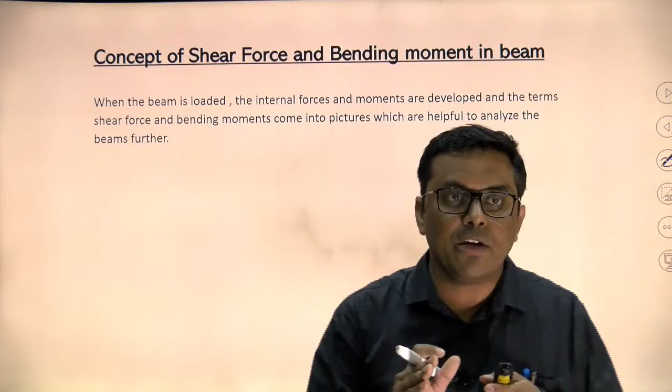I started my topic with the concept of shear force and bending moment, covering what basically shear force and bending moment is. Whenever a beam is loaded, the beam material and beam cross section offer certain resistance. That internal resistive force or resistive moment offered by the beam material and cross section is what is known as shear force and bending moment.

I am not going into much detail about why it is known as shear force or why it is known as bending moment, because that has already been covered in my previous lecture. So please go through that particular lecture.

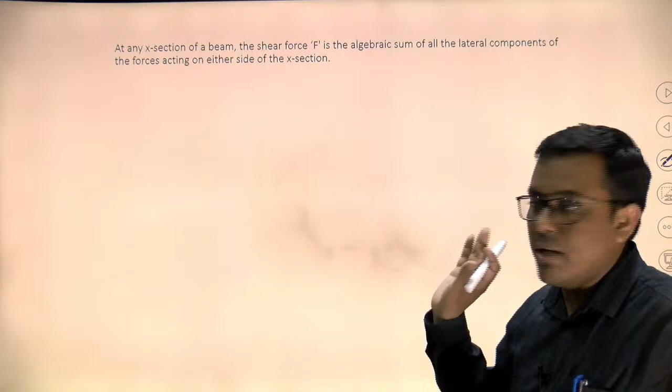Now, how to find out shear force and bending moment? I am not going into detail here since today we are focusing mainly on problem solving. Shear force at any section XX is the algebraic sum of all the lateral forces acting on either side of the section plane - either the left side's transverse forces or the right side's transverse forces. So it is the algebraic sum of all the lateral forces acting on either side of the section plane.

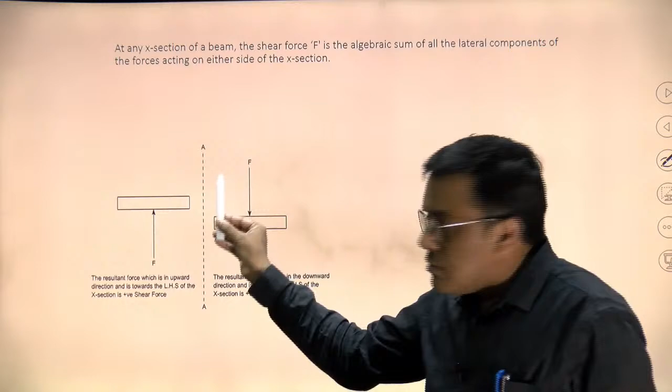Shear force is basically a force, so there must be some sign convention, and the sign convention is quite clear. If I am talking about the left side of the section plane, and the resultant of all the lateral components is upward, then I will say it is positive. Similarly on the right side, if it is a downward resultant, both will be considered positive - already covered. This is the negative one.

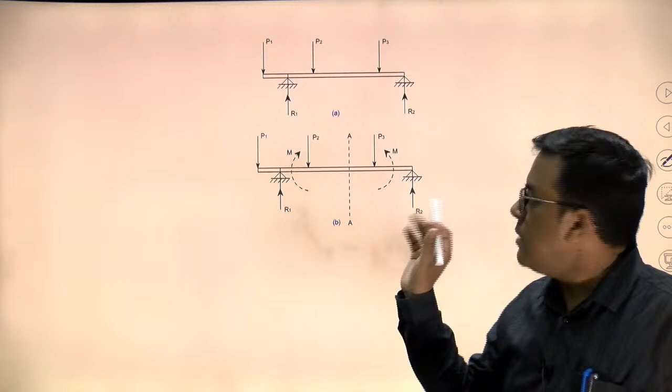Similarly for the bending moment - because we don't want the beam to get bent by any load, the beam material must be sufficiently strong to offer certain resistance against bending. That is what is known as the bending moment. And how will it be calculated? I am coming to that point.

The bending moment M is also the algebraic sum of all the moments acting on either side of the section plane. Simply, if A is my section plane, then because of all the forces on the left side, whatever the resultant moment is, similarly on the right side. So this algebraic sum of all the different moments because of various forces on either side of the section plane is considered the bending moment. This is how we will calculate it.

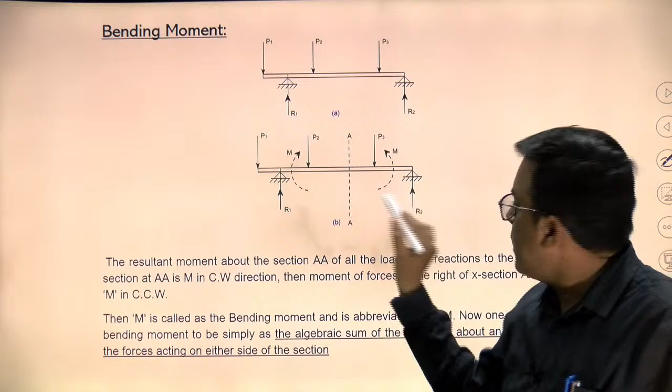And the sign convention: with the section plane shown here, on the left side if it is a clockwise resultant, and on the right side it is anti-clockwise, it is positive. Obviously, the opposite of this will be negative. So this is what is known to us.

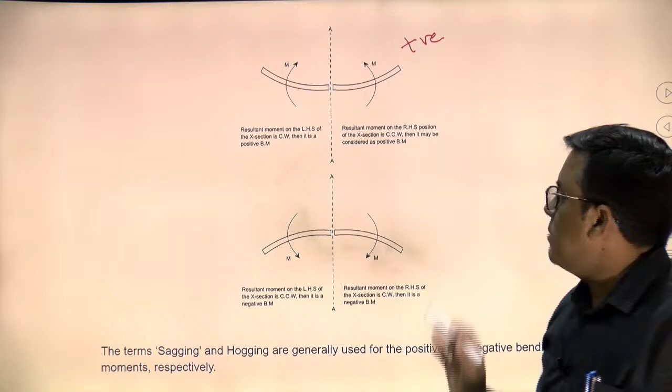Then we discussed the relation between shear force and bending moment. Yes, we tried to find out and establish that relation. I am not going into detail since it's already discussed. From an exam point of view, it can be a question for 2 or 3 marks. So those who are interested can watch my previous video, lecture number 3.

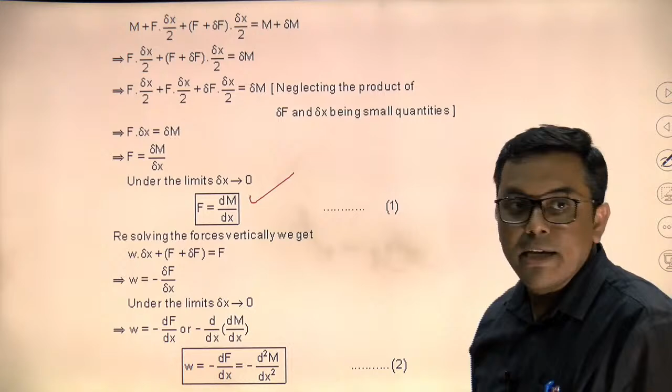What relation did we establish? We established the relation F equal to dm over dx. F is the shear force, m is the bending moment. So we are observing that there is a differential relation between shear force and bending moment. Similarly, between load and shear force it is equal to W equal to minus dF over dx.

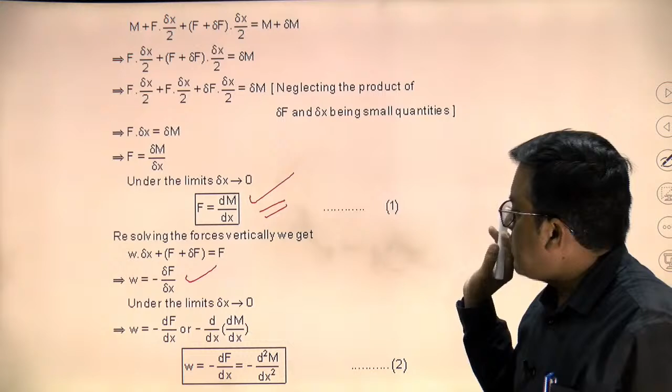But here we are focusing ourselves on F equal to dm over dx. So this is the relation between shear force and bending moment. What can we conclude? I am slightly hurried because I already covered these portions, so that's why I am going fast.

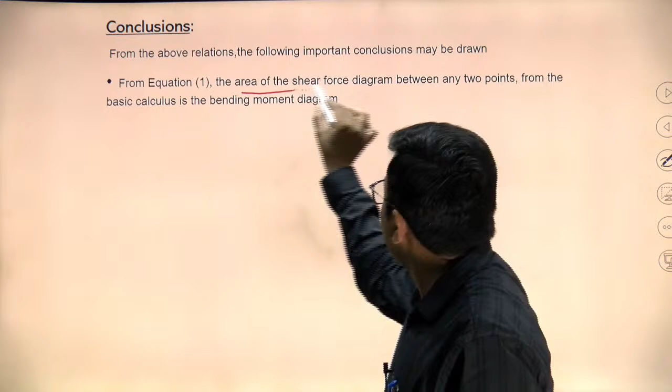Conclusion, what can we make from equation 1? Equation 1 was F equal to dm over dx. So the area of shear force diagram between 2 points is equal to the change in bending moment. This is available here: M equal to integration of f dx. Integration of f dx is the area of shear force diagram between 2 points, which will be equal to the change in bending moment between these 2 points discussed.

The slope of bending moment diagram is the shear force. Yes, it is well known. F equal to dm over dx. The curve equation is like this. The differential equation is showing this, F equal to dm over dx.

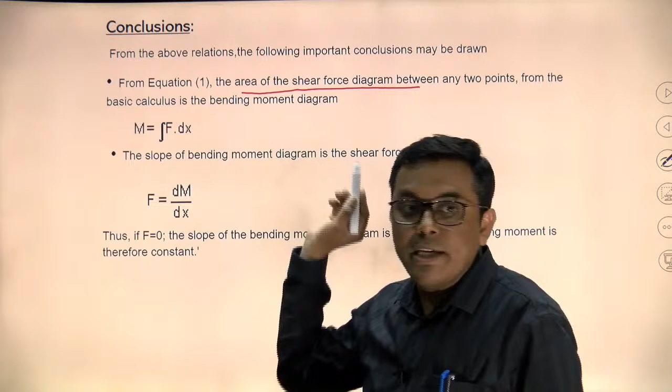Now I am coming to the point. The differential equation says if F equal to 0, then we can conclude 3 outputs. If F equal to 0, shear force is 0, then bending moment can be a constant. Yes, it will be a constant. And if F is 0, then dm over dx equal to 0, which means this is the condition of maxima or minima. So at that particular point where shear force is 0, the bending moment will be either maximum or minimum. Already concluded and explained.

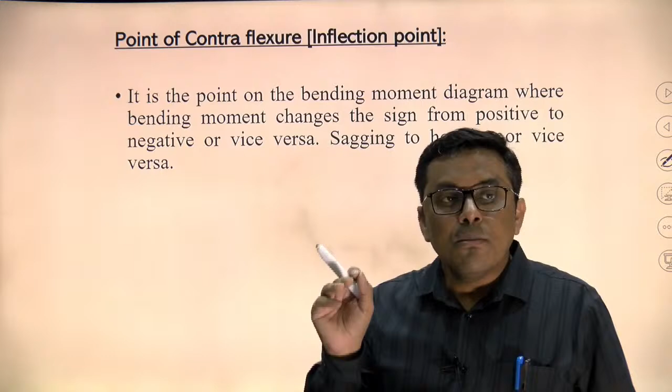So this is what is available here. Then what is the point of contraflexure? This is also discussed: the point where bending moment is changing its nature, changing its sign, changing from sagging to hogging. That particular point is known as point of contraflexure or point of inflection. Mathematically, it is the point where the bending moment is 0. Obviously, from positive to negative or negative to positive, if any curve is going, it must pass through 0. So the point where bending moment is 0 is known as point of contraflexure.

Then shear force and bending moment diagram. The loading condition is changing, the bending condition is changing, so shear force and bending moment will not remain constant in the entire length, in the entire span of the beam. So how is shear force varying with length? It will be shown by the shear force diagram, SFD. Similarly BMD - how is bending moment changing in the beam with length? This is what is known as the bending moment diagram. Okay, this is what is done.

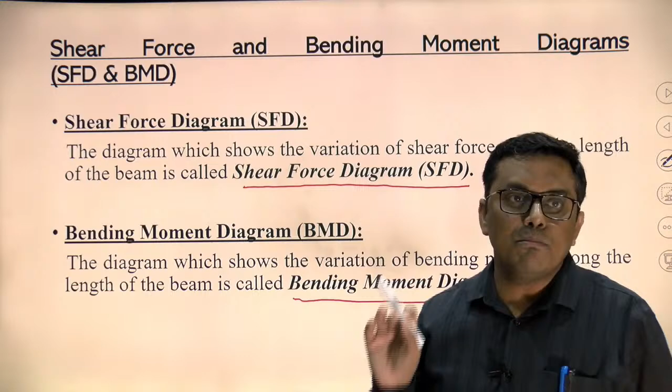Now I am coming to a different condition. In different loading conditions, what will be the nature, what will be the behavior of the shear force and bending moment, and it is presented in the form of a table. Explained very well in the last lecture - if you look at it, you will definitely be able to understand, but I am summarizing it here. If the point load is there or no load condition is there, then shear force will be a horizontal line, and the bending moment diagram will be an inclined line.

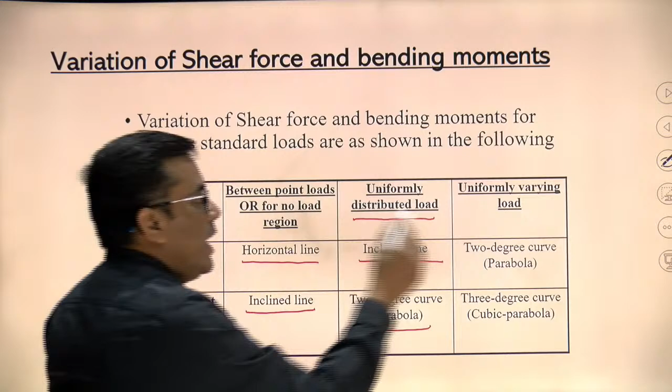If uniformly distributed load (UDL) is there, then shear force is an inclined line - again we will check this when we do the questions, then it will be more clear. So it is an inclined line and the bending moment will be a parabolic curve. And if it is UVL, uniformly varying load, then the shear force diagram itself will be a 2-degree parabola, and the bending moment diagram will be a cubic parabola.

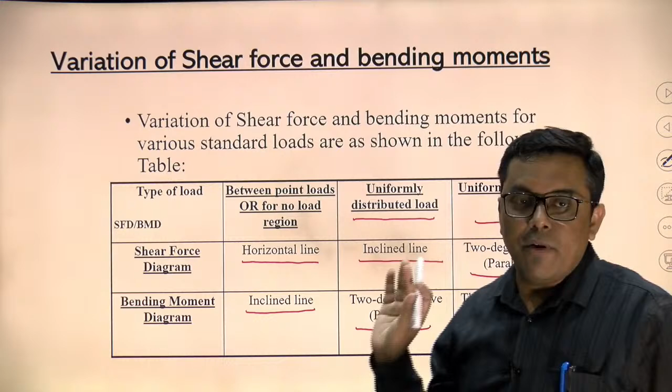So if I am ready with all these details, whatever I discussed in the last 5 or 10 minutes, then we are ready to solve the problems. Now I am coming to the problem part. I am starting with a very simple problem, a very simple question, and I hope we will be able to understand through this also. So I am trying to take 2 or 3 problems today, and in my next lecture I will take 1 or 2 more. So, a simply supported beam subjected to a uniformly distributed load - the question is very clear.

So the beam is available. W per unit length, that is the intensity, L is the length of the beam. By symmetry, we can find the support reactions: WL by 2 and WL by 2 are the support reactions.

Now for finding out the shear force and bending moment, what is the first step? Finding the support reaction is done. Those who are interested in writing these steps can write: the first step is to find out the support reaction.

Now take a section. I have taken a section XX which is at X distance from support 1. Can we write the shear force equation for that particular section plane? Yes, why not. So I am writing here the shear force at section X. What definition did I give? It is the algebraic sum of all the forces acting either side of the section plane.

At section XX, on the left side what are the forces? WL by 2, which is the upward reaction force, positive on the left side. And the UDL, this much of UDL is available here, W into X. It is minus, since on the left side it is downward. So the shear force equation is WL by 2 minus WX.

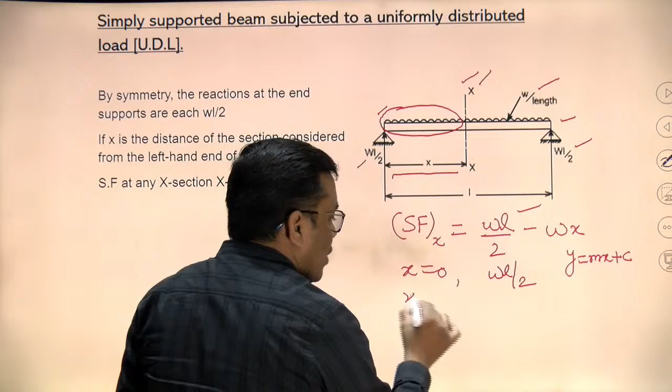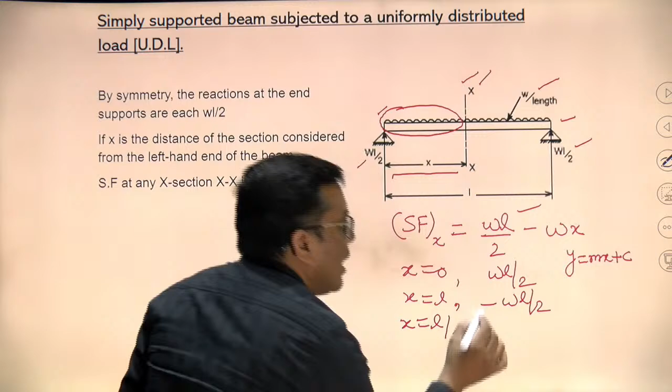So I can put many values. If I put x equal to 0, shear force will be WL by 2. If I put x equal to L, shear force will be minus WL by 2. You can check this by putting the value yourself. Those doing this with me can write the answer in the chat box. At x equal to L by 2, it will be 0.

So this is the shear force. For the shear force diagram, I got the equation, along with different values at different points: at x equal to 0, at x equal to L by 2, and at x equal to L. At different positions it is available. No confusion, just a simple equation written.

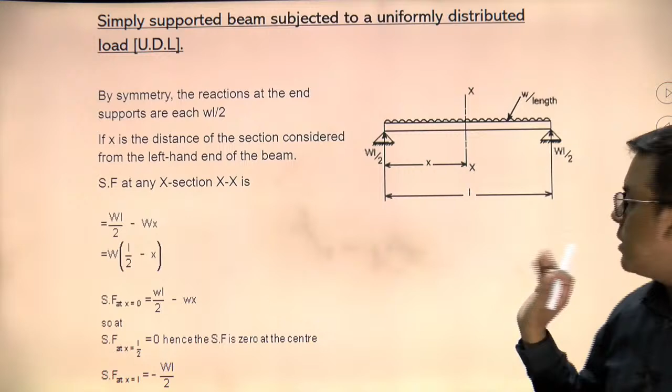Now I am coming to the bending moment part. So I will write the bending moment equation from here. Let me erase this. Now I am writing the bending moment equation at section X.

What will it be? It is the algebraic sum of all the moments acting either side of the section plane. There are two forces: one is WL by 2, another one is WX. So there will be two moment components. The moment due to WL by 2 about section XX will be WL by 2 into X. The rotation tendency is clockwise and it is on the left side, so it will be positive.

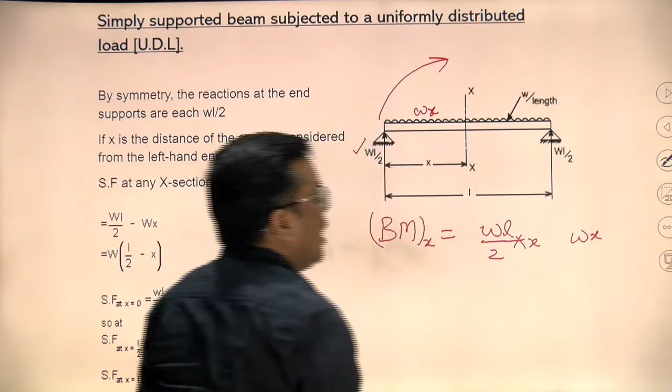Now I am coming to WX. This is the UDL. Where will it be effective? It will be effective at the midpoint. How far will it be from the section plane? It will be at x by 2 distance, so I am multiplying it with x by 2 - load into perpendicular distance. Will it be positive or negative? It is on the left side and anti-clockwise, so it is minus, negative.

This bending moment equation is valid from 0 to L. So at x equal to 0, bending moment is 0. At x equal to L, bending moment is also 0 - it cancels out, please check.

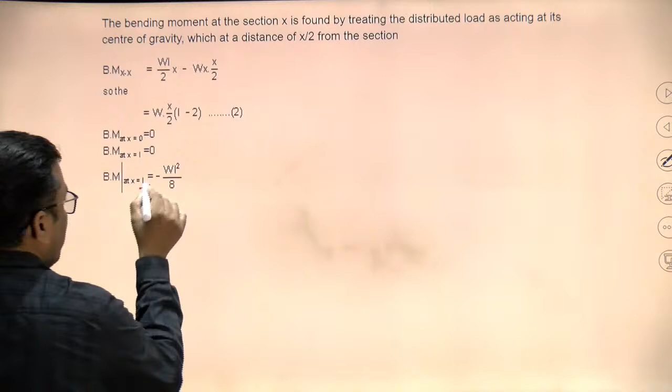The nature of the bending moment curve is parabolic, x square. Question is clear. So the bending moment equation, we can check here - it should be L by 2 at x equal to L by 2, there's a slight misprint. So the bending moment already explained, all these points - the bending moment equation is available, then at different points the bending moment values.

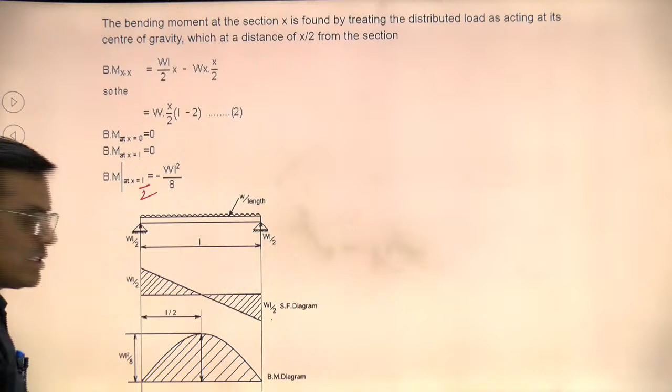Bending moment at x equal to 0 is 0, at x equal to L it is 0. At x equal to L by 2, where shear force is 0, at that point the bending moment is maximum and it will be WL square by 8. So it's a very simple problem, I don't think there is any issue with this. Very clear. Now I am reaching to the next one.

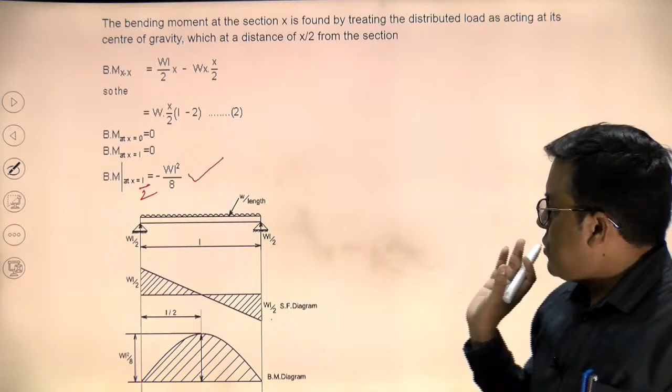We take a different type of load now. The simply supported beam shown below carries a vertical load that increases uniformly from 0 at one end to a maximum value of 6 kilonewton per meter at the other end. Draw the shear force and bending moment diagram. It means instead of UDL, I am now considering UVL, uniformly varying load.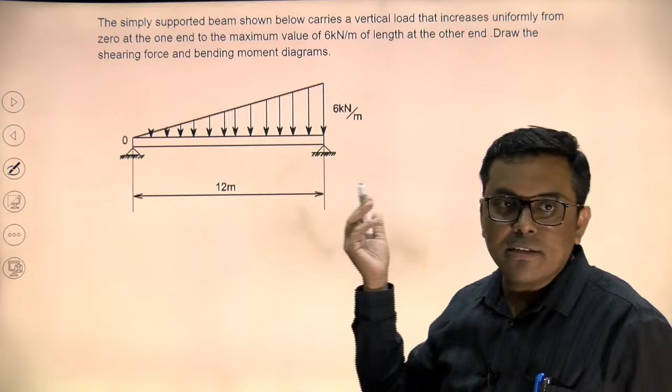For finding support reaction, either I should remember the formula for UVL - it comes out WL by 6 and WL by 3. If it is not remembered, we can apply sigma Fy equal to 0, algebraic sum of all vertical forces. So R1 plus R2, these reaction forces at point 1 and point 2, will be equal to the area of this UVL triangle, so it will be half into 12 into 6.

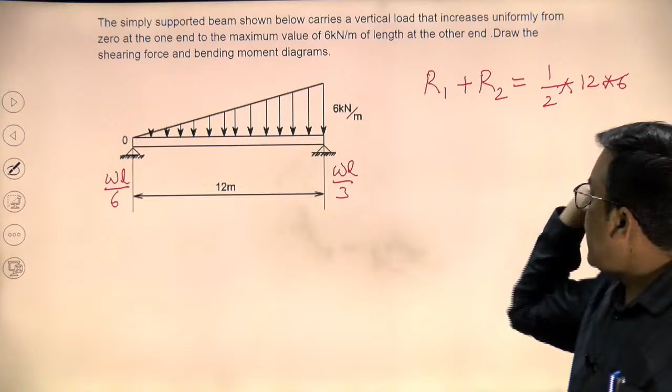Then I will take the moment, either about point 1 or point 2, whichever point you want to select. Because of R1 about point 1, the moment will be 0. Because of R2, the moment about point 1 will be R2 into 12. Then the UVL remains, let's take that too - so load is half into 12 into 6, and it will be effective at 2L by 3.

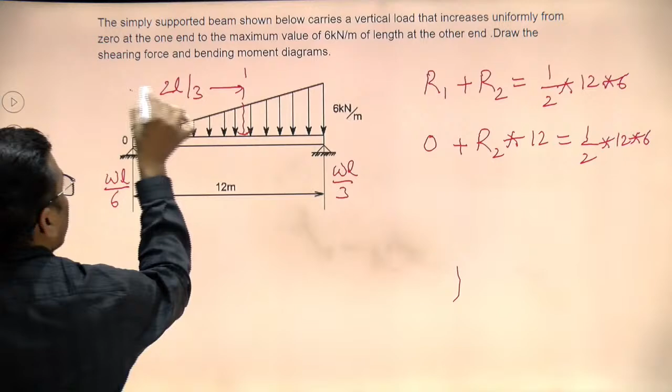Please keep calculating the answer along with me. Praveen Yadav is available, he is my student from second year. So please Praveen calculate - how much is 2L by 3? Simple. So I can multiply it with 2 into 12 by 3.

What is the answer? Let's calculate - so R1, R2, this comes out to 36. Then the support reactions are coming out as 12 and 24. So the first step is done - a very basic step, if this goes wrong, the entire question will be wrong.

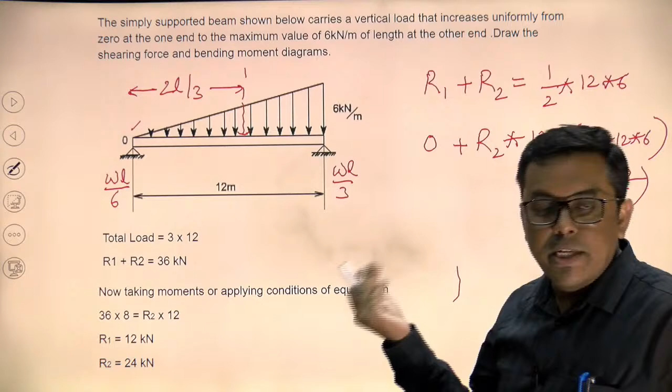Now what is the second step? Take the section plane. So now I am taking the section plane at x distance, support reactions already written here as 12 and 24. Now I am writing the shear force and bending moment equation, considering a section plane XX at x distance.

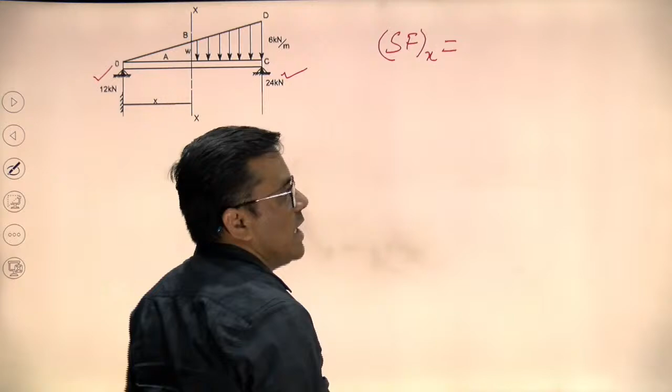So now write the shear force equation. Shear force at section XX, which is at x distance, is the algebraic sum of all the forces acting either side of the section plane. So on its left side, what are the forces? 12 positive we will take, known already.

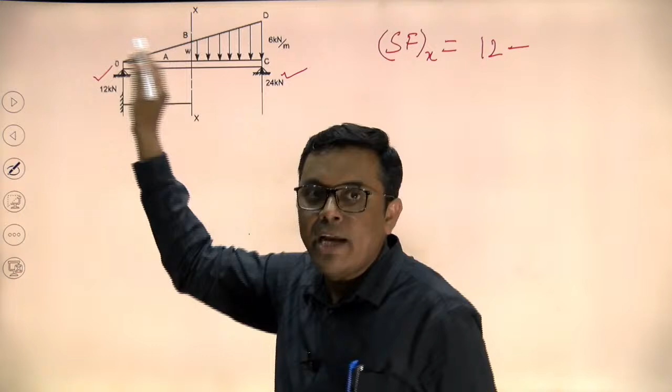Then area of this triangle, area of this triangle, because this small triangle OAB which is on the left side, so that I will be considering. I made the triangle here. Okay, I have to take the load of this triangle. How will we find it out?

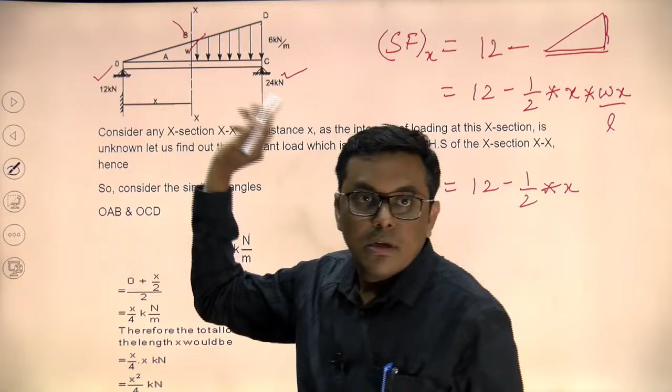Now 0 plus x by 2, by 2. This is x by 4 kilonewton per meter. So it will be, therefore the total load over the length will be x square by 4. x square by 4. Getting it or not? If not, then let's do it again. Okay, how much is it?

Now I have to take the area of the triangle. Area of the triangle, so half into x into y, and y equal to x by 2. Y equal to x by 2. So it is coming out x square by 4. I hope it is clear.

Okay, now the shear force equation: 12 minus x square upon 4. What is 12? That is the support reaction. 12 is the support reaction. x square by 4 is the load of this small triangle, which we found from the area of the triangle. x square by 4, how is it? It is the parabolic equation.

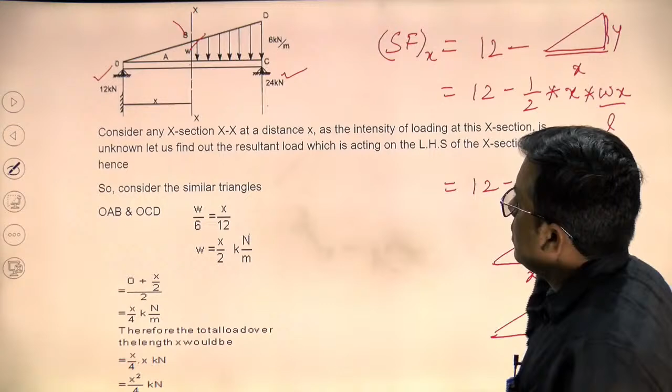Okay, now bending moment equation. May I check the bending moment equation at this particular point? Yes. Bending moment equation, bending moment at point x. There are two load components, two force components which are contributing in shear force. So definitely two moments will be there, 12 into x, because of this support reaction.

It will be clockwise, positive. Then the second component is x square by 4. x square by 4, whose load is this? This is the load of this UVL. And where will it be effective? x square by 4, if you know, then it will be at 2x by 3, and from the section plane it will be at x by 3. So 12 into x minus x square by 4, which is the UVL, into x by 3.

We are taking the moment about the section, not about the supports. Okay, how did the equation turn out? We are observing it is cubic. So now we have the shear force equation, and now we have the bending moment equation.

Okay, valid from 0 to L. So at x equal to 0, in this particular equation, the shear force comes out 12. We put x as 0, it is 0. Shear force at x equal to 12, meaning at the second support: 12 minus 12 into 12 by 4, it comes out minus 24. And the point where shear force is 0, that point is necessary because we also need to find the maximum bending moment.

So that is 12 minus x squared by 4, it is coming out 6.92. Calculate it along with me, don't just note the answer from here.

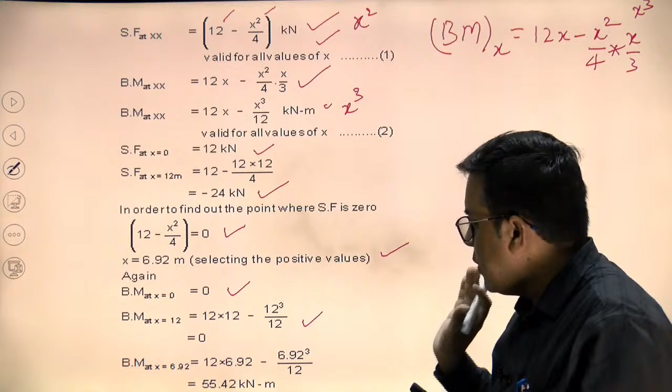Similarly, for the bending moment, at x equal to 0, bending moment will be 0. At x equal to 12, bending moment will be 0. For a simply supported beam, write this down: at the supports, generally the bending moments will be 0. And at x equal to 6.92, which point is this?

F equal to dm over dx. The point where shear force is 0, at that point, bending moment will be maximum. So it is coming out by putting this value.

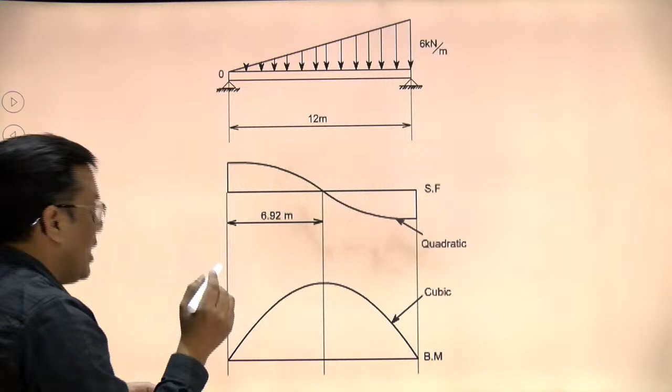Now you can see the shear force and bending moment diagram. Shear force diagram will be like this. It was a parabolic equation, parabolic equation. Bending moment was a cubic equation. We can write the values also. How much were the values? At shear force, 12 and 24.

Shear force is 12, 24 kilonewton, 12 kilonewton. Here the bending moment is 0, bending moment is 0. Check it, this is what we got, right? Yes, 0. And at 6.92 it is 55.42 kilonewton meter. So this is the shear force and bending moment diagram.

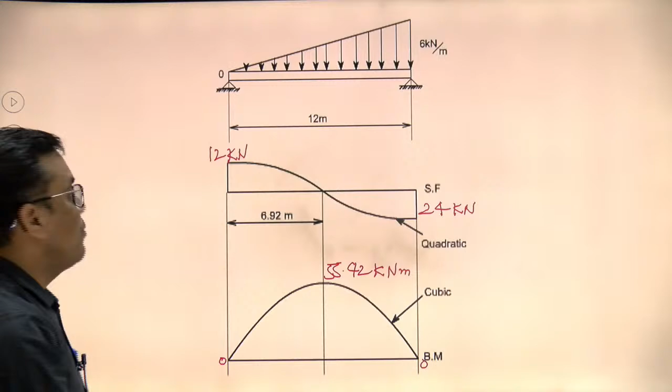So we have taken two types of problems. One related to UDL over entire length, another related to uniformly varying load over entire length, with some numerical data. At least now we have learned how to put a section. Now I will take the problem standard one step further, nothing more than that.

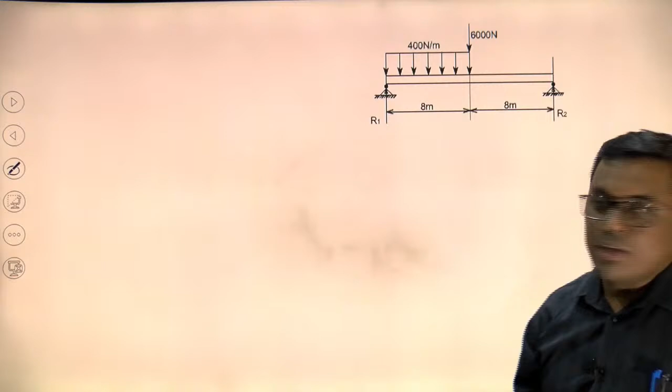Which type of beam is it? It is simply supported, subjected to two types of load. What are the two types of load? One is the UDL of 400 Newton per meter intensity. Another one is the point load at the midpoint with intensity of 6,000 Newton.

So what is the first step? The first step is to find out the support reaction. Very first step, please find it out quickly. I am waiting for 1 minute, that is sufficient to find out the support reaction.

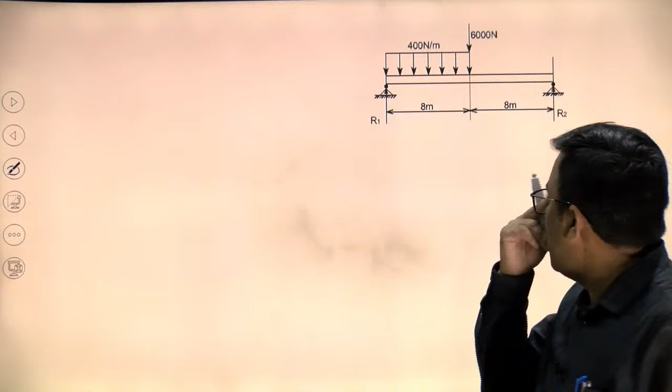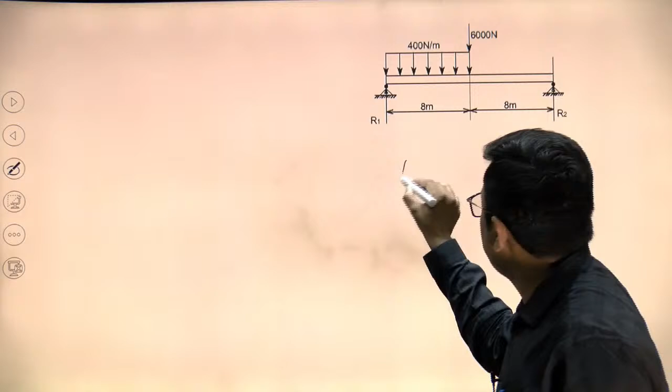Okay, got it? No. Let's give a little help. R1 plus R2 equals 400 into 8, this is the UDL, plus 6000. So it is coming out 9200... 3200, 6000. R1 plus R2 equals this.

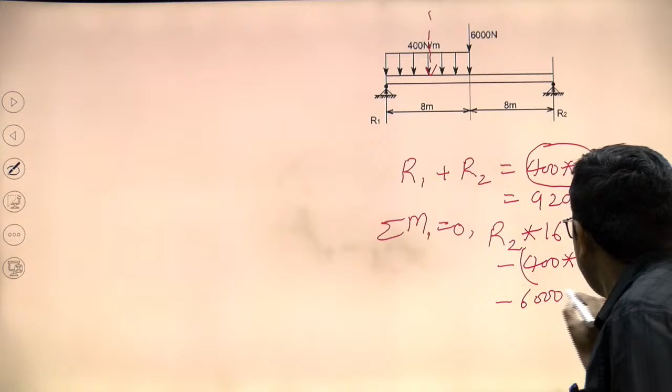Now for finding out R1 and R2, write the moment equation about point 1. Because of R1, moment is 0. Because of R2, the moment will be R2 into 16. Then because of this 400 into 8, where will it act? At the midpoint. So minus 400 into 8 into 8 by 2, minus 6000 into 8, equals 0.

Please check, check the equation. Have you written the same one or something else? R2 into 16 minus 400 into 8. 400 into 8 is the UDL and it will be effective at the midpoint as already shown here, and 6000 into 8.

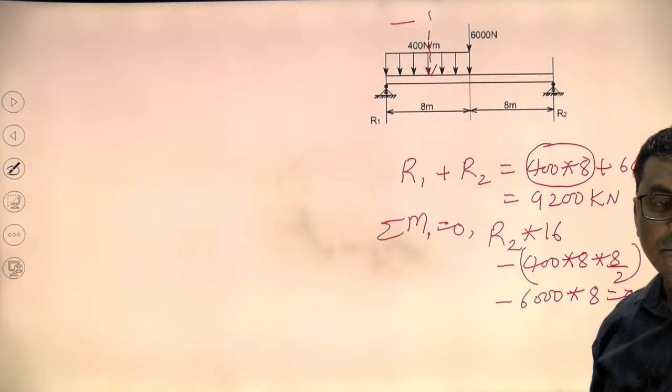And what are R1 and R2 coming out to be? Is anyone finding it out? No. Let me calculate R1 and R2. R1 is 5400 and R2 is 3800.

Now for finding out shear force and bending moment at different points at different locations, and how the diagram will look. Okay, how will it be? Why isn't the eraser working?

Okay, what should be done now? Now what to do for finding out shear force and bending moment? Now how many sections are required here? First question, how many sections are required? 2, because we are observing 2 variations in the beam. The loading condition changes once, so that's why we require 2 sections.

One I am taking at x distance from point 1. Okay, what will be the shear force equation? Shear force at section x.

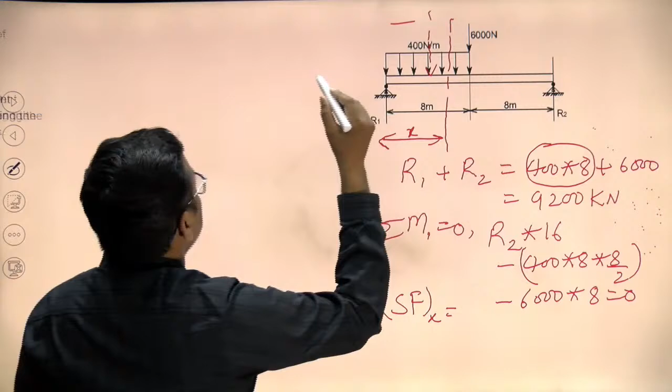Shear force at section x, what will be the equation? Whatever forces are there on its left side, the forces are R1. How much is R1? R1 is 5400. So 5400 positive, minus 400 into x, this is the UDL. Is this the right equation?

5400 minus 400 into x. This equation is valid from which point to which point? It is valid from this to this. This equation, SF at section x, is 5400 minus this. So let me write the length for both.

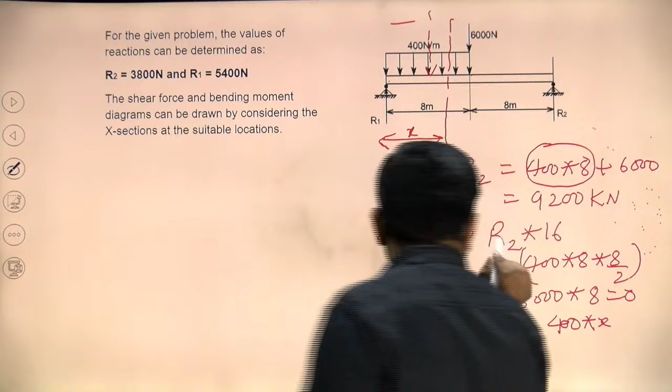At x equal to 0, shear force will be how much? It will be 5400 Newton. And at x equal to 8, how much will it be?

We can calculate it, calculate and tell the answer. It will be, how much will it be? 5400 minus 400 into 8. Yes or no? How much is the answer? 5400 minus 400 into 8. I hope it is coming out to 2200 Newton. Please check.

And it is on the left side of point C, which is the midpoint. So I will be writing here 'just left of C', because the section plane is on the left side.

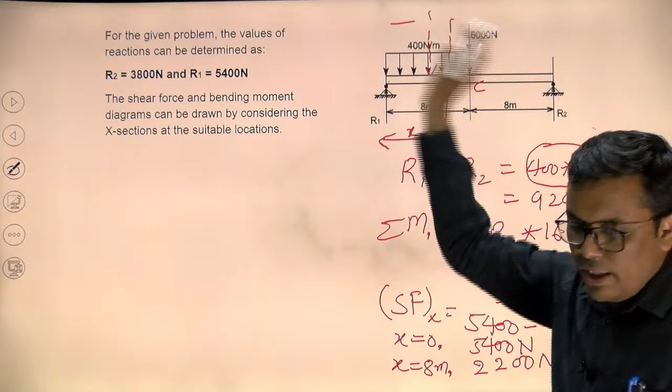Where do we have to check this? At the point where we are getting the point load. So here at point C we have a point load. So on the left side of the section plane and on the right side of the section plane we will get different values of shear force.

So on the left side at x equal to 8 it is 2200. Clear? Shear force equation is clear now.

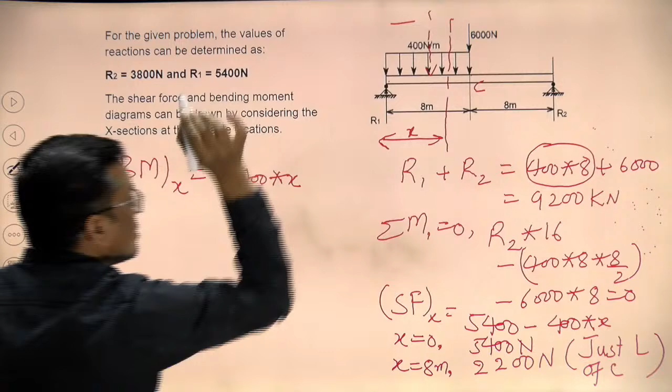Now I am coming to the bending moment equation. Bending moment at section x, what will it be? It will be 5400 into x, minus 400 into x. In the shear force equation these are the same two components. And how far will it be from the section plane? X by 2.

Let's check the equation. The shear force equation is an inclined line equation, the bending moment equation is a parabolic equation, a 2nd degree parabola. So it's 5400 into x minus 400 into x by 2. This equation is valid from where? From point 1 to C, from the midpoint.

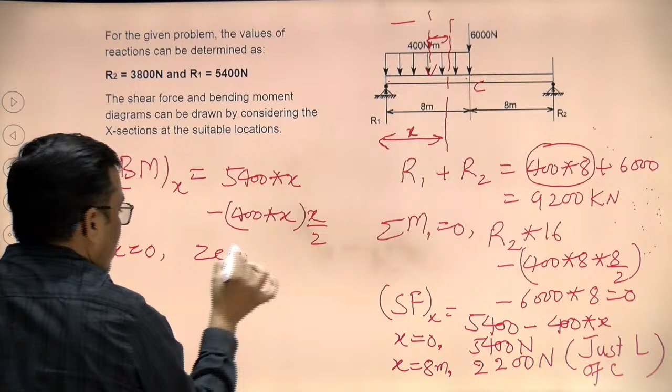So at x equal to 0, bending moment is 0. At x equal to 8, how much will it be? Calculate it, put x equal to 8 into this equation. Please put x equal to 8 and see how much it comes out to.

You can put it in, it's not a big deal. 5400 into 8 minus 400 into 8 into 8 by 2. Please calculate this. You need to calculate it yourself. According to me, it comes out to 30,400 Newton meter.

If you are not getting this value, then you can check it again. So this is the bending moment.

Now, this section is not sufficient because after point C the condition is changing. So I am taking another section here.

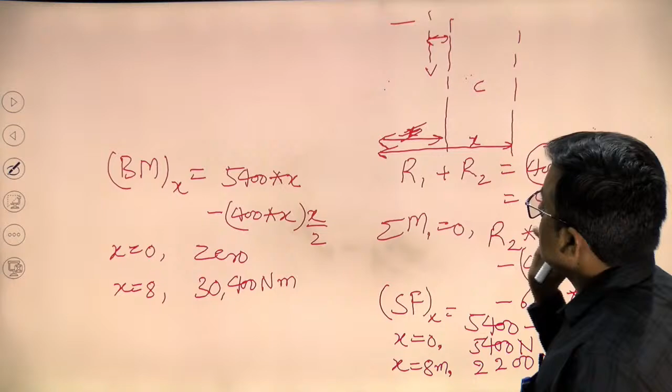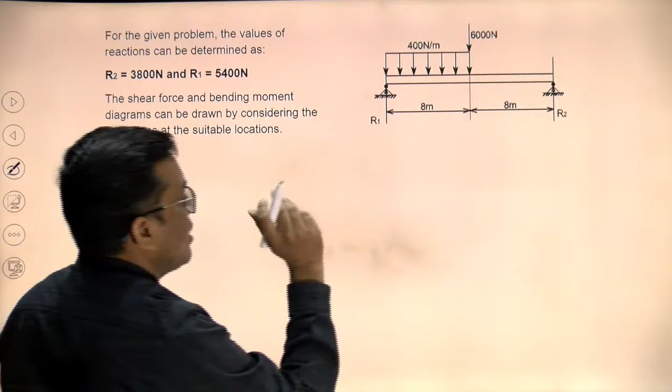Now I am writing the bending moment equation for this point. The section I am taking here is at x distance. Okay, shear force - this is the second section. The first section is already done, so don't get confused. And if there is confusion, then we can take x1, x2. We will consider all of them as x. Okay, so this is the section.

What are the forces on the left side of the section plane? R1, which is equal to 5400. Then the entire UDL is there. Yes, the entire UDL is there, so that will be equal to 400 into 8. Then the point load is also here.

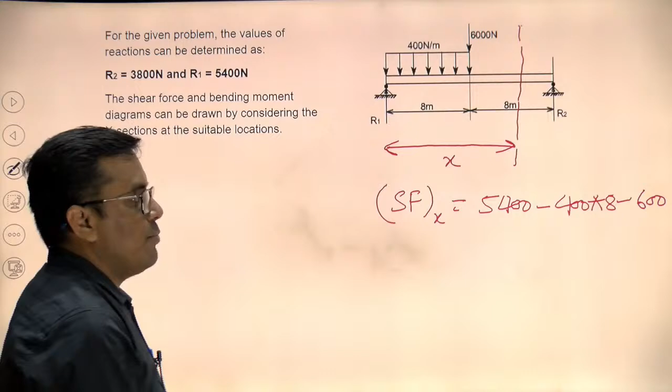5400 minus 400 into 8 minus 6000. How much does it come out to? What is the calculation? Minus 3800 Newton. And what are we observing?

This is the y equal to constant equation, y equal to c. It means the shear force diagram will be a horizontal line. We have already mentioned that where there is zero load condition or only a point load, then the shear force diagram will be a horizontal line.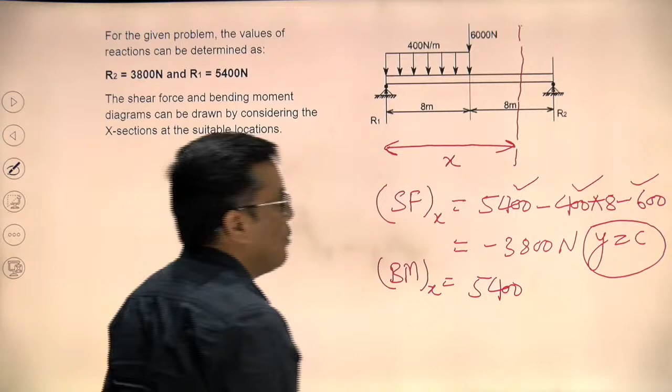So the equation is also suggesting the same thing. Now I am writing the bending moment at x. Bending moment, how much will it be? There are 3 force components, 3 load components, so 3 moment components. So 5400 into x, minus another load component which is 400 into 8. And how far is it? 400 into 8, where will it be?

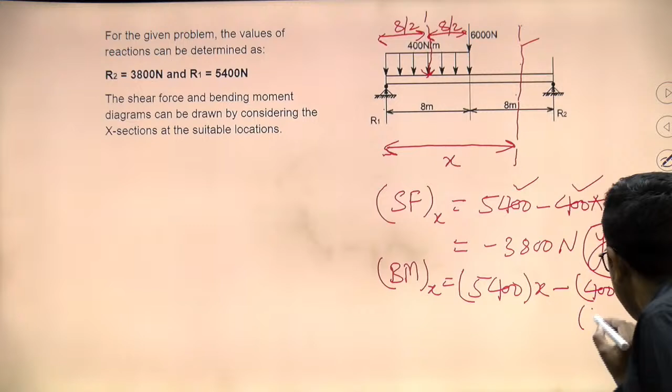Another component which is 6000. 6000 kitna hoga ye? 6000 into what? x minus this. I am interested in this distance. So this is x minus 8.

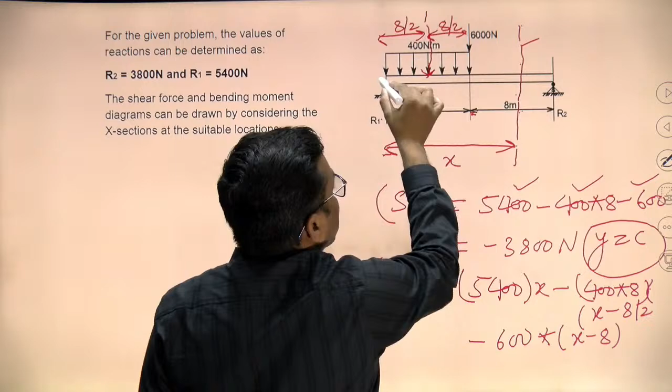Okay, clear? Itni baat clear? 5400 into x, 400 into 8, which will be effective on the midpoint of this 8 meters. So 400 into 8, this is load, and it will be effective. So x minus 8 by 2, this is the distance.

Now I am finding out the bending moment. Kahan se kahan tak? From point C to point 2. So I can put the values. For point C, x equal to 8. So at x equal to 8, shear force vary karega kya? Shear force to x par depend hi nahi kar raha. Shear force is not depending on x. So it will remain constant, it will remain minus 3800.

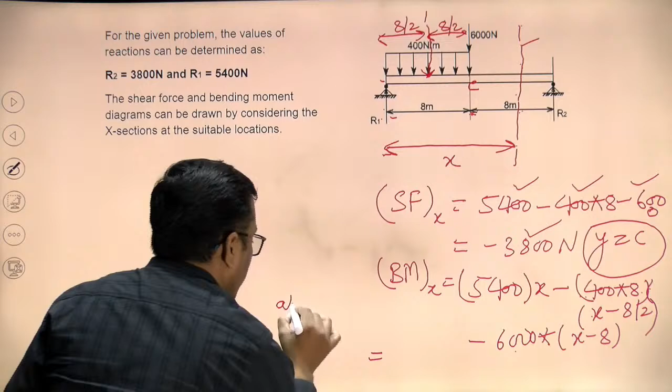Kahan se kahan tak? From point C to 2. The bending moment is depending on x. So bending moment x, if at x equal to 8, likh doon yahan par, at x equal to 8, how much it will be? 5400 into 8 minus 400 into 8. This is what the UDL. 8 minus 8 by 2, so it is coming out 4, and this quantity will become 0.

Kitna calculate hoke aayega bhai? Please tell me at x equal to 8. I hope it is coming out 30,400 Newton meter. Already nikaal chuke hain hum, pehle nikaal chuke hain section 1 se bhi ye result. And at x equal to 16, let me erase this. It is not erasing. Strange. No way. Chaliye hum idhar se hi kaam kar lete hain.

Now at x equal to 16. So what I will be doing? Bending moment kitna hoga? It is 5400 into 16 minus 400 into 8. x ki jagah 16. 16 minus 4, 12.

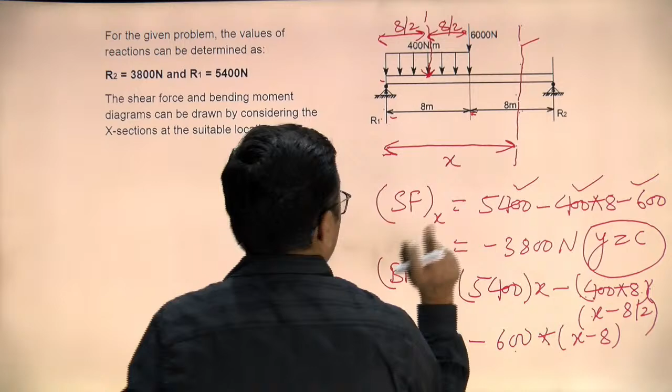Okay, so now we will see the shear force diagram from this point to this point. Inclined line equation tha it was, okay. So inclined line at point C, which was the midpoint of that, at this point we are getting two values of shear force, one for the left side, another one for the right side. So for the left side it is 2200, on the right side it is coming out 3800, and from this point to this point it remains constant.

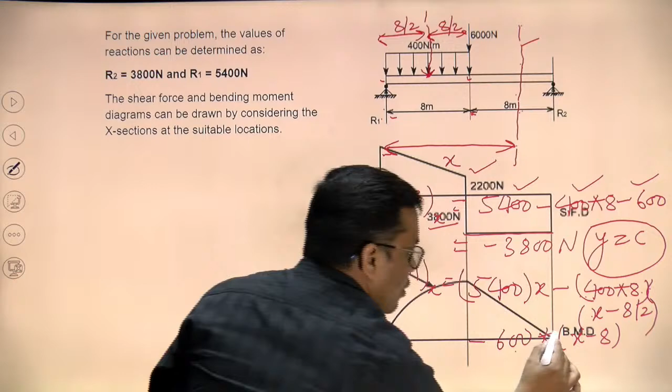So constant, okay. Bending moment at 1 it is 0, at 2 it is 0, at the center it is coming out 30,400 Newton meter. So like this we can draw the shear force and bending moment diagram. Thoda sa shear force diagram, bending moment diagram overlap kar rahe hain, so that's why it is not coming properly, okay, but we can see here. I hope now we are able to write the equations, shear force and bending moment diagram equations, and we will be able to draw the shear force and bending moment diagram.

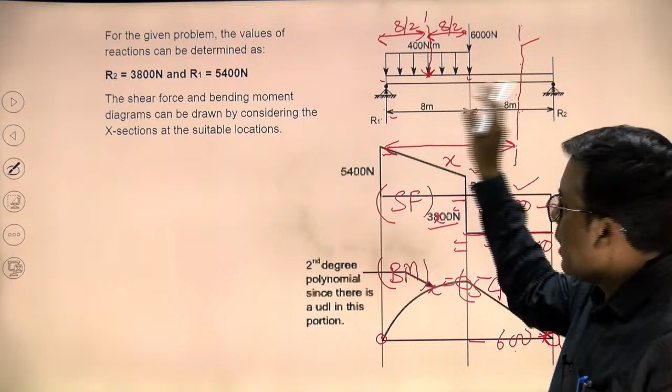If we are interested in more problem solving, then definitely in my next class I will be taking one bigger problem in which we will be putting 3 or 4 sections, and through which you will be getting a clear picture ki how shear force and bending moment diagram will be drawn. But before that, please go through this particular video where you will be able to understand ki how to write the shear force equation and bending moment equation. So thank you very much for watching the video, and I hope you will be getting some knowledge, you will be getting some information. Thank you very much.